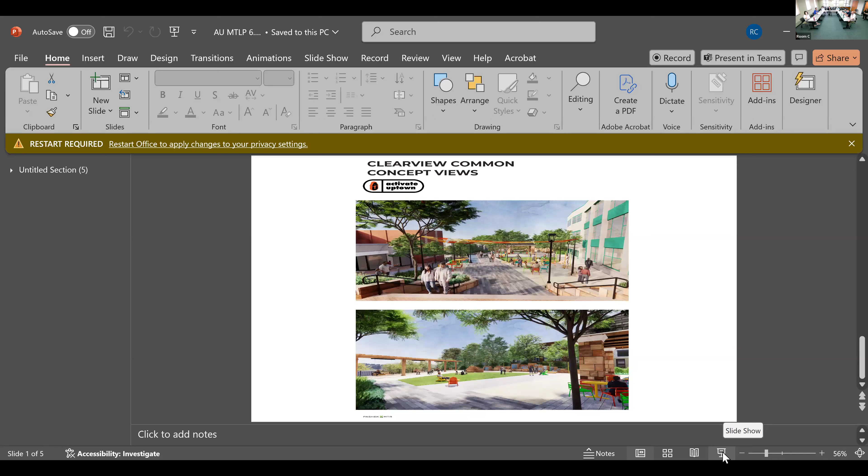Fantastic, well our techie is pulling it up. I'll start setting the table, and if you guys don't mind, I'm gonna stand up at the front just so I can point out some things, and I think it will be a better presentation for those in the room and anyone watching at home. You won't get to see all of my gesticulations, but we can describe them. That's right.

So again, this is the Activate Uptown presentation. This is a very high-level presentation, not the full report. So what I want to do tonight, my goal, my objective, is to give you a broad view of where we are with the Activate Uptown plan. The full report is under development right now by Pashek MTR, and we're getting opinions of cost by Gateway. My goal for the commission at this point is to present the report with opinions of cost in July, more than likely at the first meeting and maybe the second meeting, where I'll go through that, and I'll share the full report once it's complete. But tonight, I'm gonna walk you through an overview of the project area, and then get into some specifics and key nodes that we focused on. The Activate Uptown plan is a riff or a reverberation from the Vibrant Uptown project, which is complete.

This is more as a refresh, for those at home who might be watching at a future date. When we were planning that, we were looking at sidewalks, conduit lighting, really just the sidewalk, that public realm. But when we were doing that, it became very clear that we wanted to start putting attention into some key nodes that we can potentially activate and improve in the guise of placemaking.

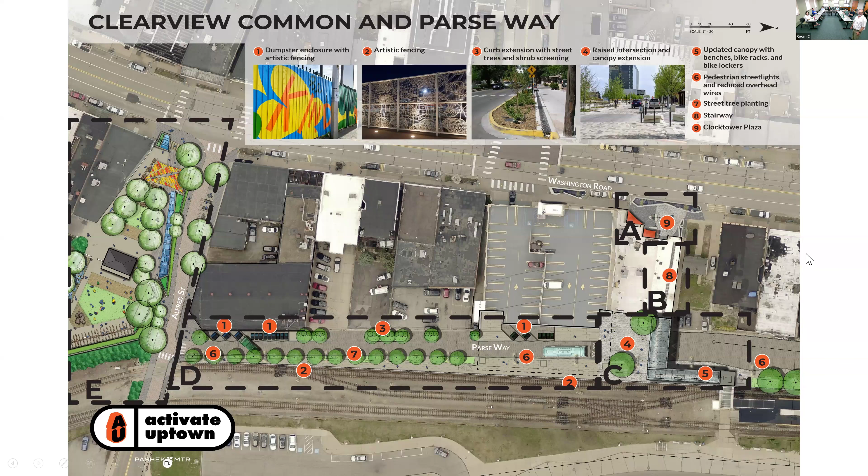Because this really, here we go, bam. So, Clock Tower Plaza. Some of the things I already mentioned, sun shading, and keep in mind this is high level conceptual. So when we go into actualizing this plan, we're going to be going back to the steering committee, of which Kirill sat on, and Grace from this body, as well as members of the partnership, Port Authority, various other folks. So when you see this stuff, we're not married to it. This is just giving you the concepts.

The mosaic public art that I mentioned was proposed for this very long bench seating that sits along the planter. An informational digital information booth, something we've talked about for years, and something that could roll out to other aspects of the district. But this seems like a good place to start. You could have the T schedule there, different events happening uptown, new businesses, things of that nature, to really kind of tie that in.

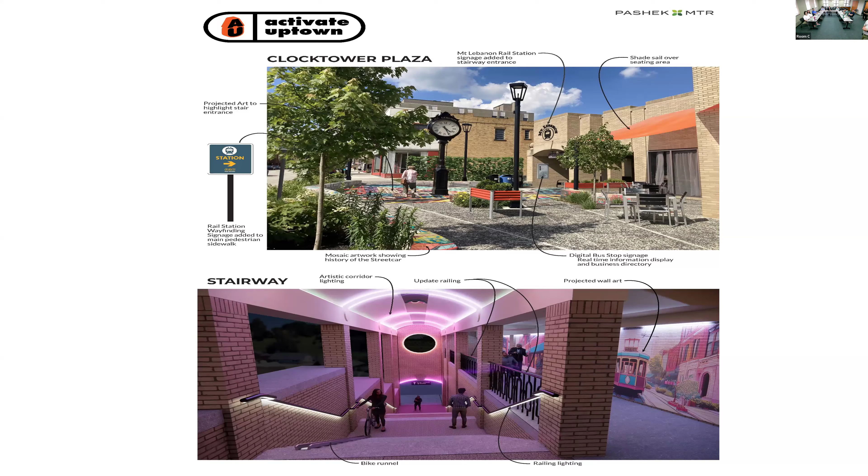All right, let's go to the next, please. This is where we're getting into what I keep calling the big idea, because it's going to be a big number, but it's also a big change.

So just to orient everybody, the current footprint of Clearview Common essentially ends here. Right behind is the pavilion. Right up around here is where the current fountain is. And then you have a series of terraces.

People don't use Clearview Common — they just don't. Now, we use it when we have events, but you rarely see people there. You occasionally see some teenagers or somebody sitting around the fountain, but it's not really fulfilling its mission. We want to change that, and hence what we're proposing here.

Before I get into the big idea, there are elements of this that, again, can be punched in. So there's short-term, mid-term, and long-term. When I do the full presentation to the commission, we'll really be teasing that out. But there are some very simple elements here that we can do now.

For example, the furniture that's there — that was bought at Target during COVID. I can't believe it's still there, but it is. We've had to do some repairs, so we're looking to invest in some better furniture, and that's something we can potentially do next year. You can imagine Adirondack-style chairs.

If you've traveled, or you've been in the Strip District, you don't have to go that far — what the Strip is doing is a lot of placemaking type stuff. So those are things we can do short-term. Sunshades, all that kind of stuff can be baked into the short-term planning.

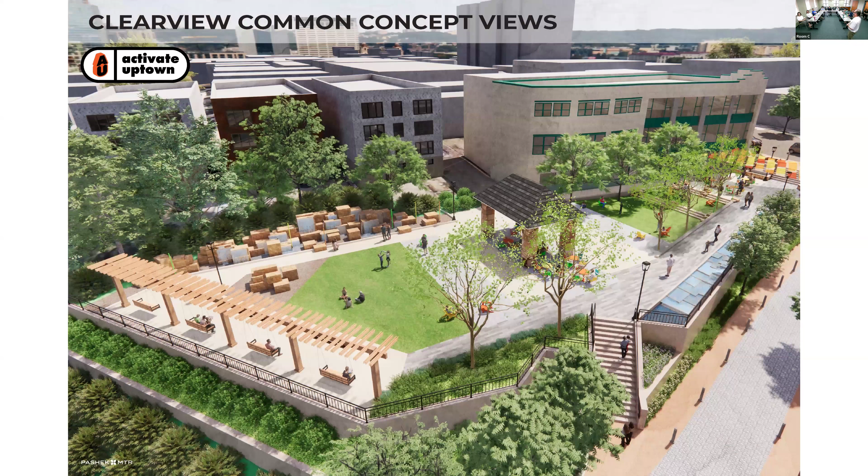So if we could just advance to the next slide. Now this is giving you a three-dimensional view of what we're talking about. Again, the swings at the back end, the rail line is here.

This is a rock runnel fountains circumstance, similar to what you see down around PNC Park, but not quite the same, that one you can kind of sit down in. This one you could maybe do that, but it's designed a little bit different.

There's the other water feature where we are proposing eliminating the current fountain because it has a series of problems and it's also just ugly. But we're looking to bring it yet another, imagine a cascade. We're trying to seize the topography, so water goes one way, down. We're trying to capture that and create the sense that you're in that sort of dynamic circumstance.

The pavilion is not moving, we're going to keep that as the fulcrum of the site. So when bands play, we may have to reorient how they set up, but that would stay as it is.

But you can see with the expansion of the Clearview Common area, this is someplace you actually would want to go, and someplace you not only want to go, but spend some time.

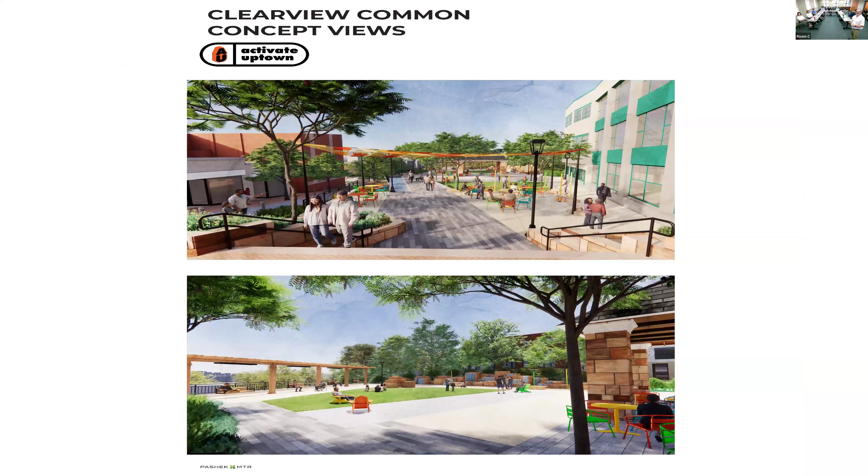All right, why don't we just go to the next one? So this provides some additional viewscapes of what it could look like, and you can sense that already just from these conceptuals. It's a radical redesign, hence the term I keep using, big idea, because there's a lot involved with this. There's a lot of engineering, there's a lot.

Grading is awesome. I mean, the fact that you're going to expand, I don't know if it's north or south or east or west, but... That's east. Okay, so expanding east feels really good.

Now, the corner where all the steps and the fountain are now, will that get... I know you said the fountain is potentially going away, but that, as your word is, janky, that's a little hard to navigate right now. It is, and again, it's Mount Lebanon, not flat Lebanon, so we have to deal with the topography that God gave us. But this gives you that view. So this is Washington Road up here, and you're looking down. So this over here would be that step fountain, over on this side. And the way that it opens up and leads you into the site, you can see all the way to the back.

So again, there's the pavilions, sun shading, new furniture, this type of thing. And you can start to see a little bit, a little flavor of what's happening to Alfred Street with zero curb, bollards, that type of thing. So you're not just transforming Clearview Common, you're transforming the entirety of the true center of Uptown. Clearview Common is the heartbeat from an urban planning perspective of the Uptown district. So you're embracing it, celebrating it, and making it something people want to interact with and not pass through, which is basically right now what it is.

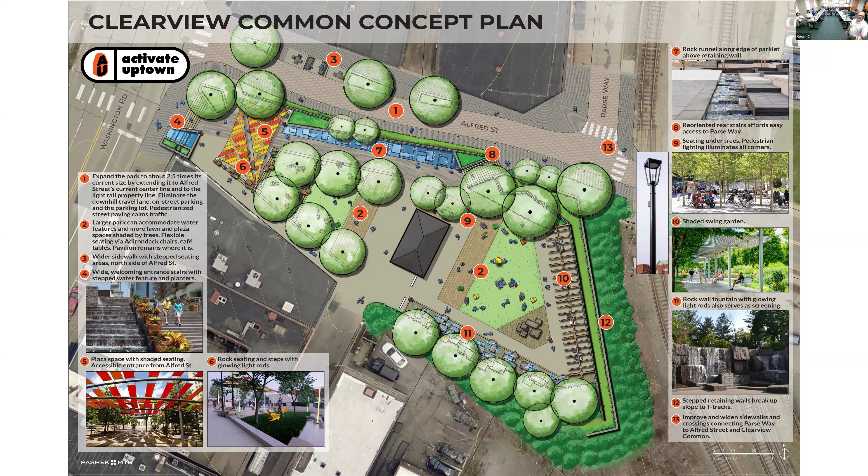Is that a driveway of sorts? Yeah, so this is an alley, and to this date, the current footprint ends right around here. There are two handicap parking spaces there, it's the only place we could legally put handicap parking, so a lot of people don't realize that. But you can park back here, there's ADA accessible parking, it would be here roughly. So this is an active alley, and cars currently do pull up here, and we have bands set up, things like that. So that would remain. There has been talk about potentially also improving the alley at some point, but that's not high on the list right now, though it's something that could be done.

But yes, the way that this is designed, there's another image I didn't put in the slide deck that shows vendors set up here. Because one of the challenges we have with the farmers market, people are like, why don't you just put it down at Clearview Common? Because nobody wants to be there, it's that simple. It's below grade, all these things, it's just not a pleasant place to be, and the vendors feel shoehorned. But yes, you could get some food carts in there, the farmer's market. Yeah, it'd be a nice place during lunch times, holiday weekends and things. Yeah, and we've tried that. When we did have a food cart at one time years ago, we had a hot dog truck. Didn't last long.

The thing I would think about is just a little more shade in there. The thing that keeps me out of Commons is the sun and the heat. It just feels kind of barren and open. More opportunity to bring your lunch from a place in Uptown, come walk, sit down, have a nice quiet place to have it outdoors.

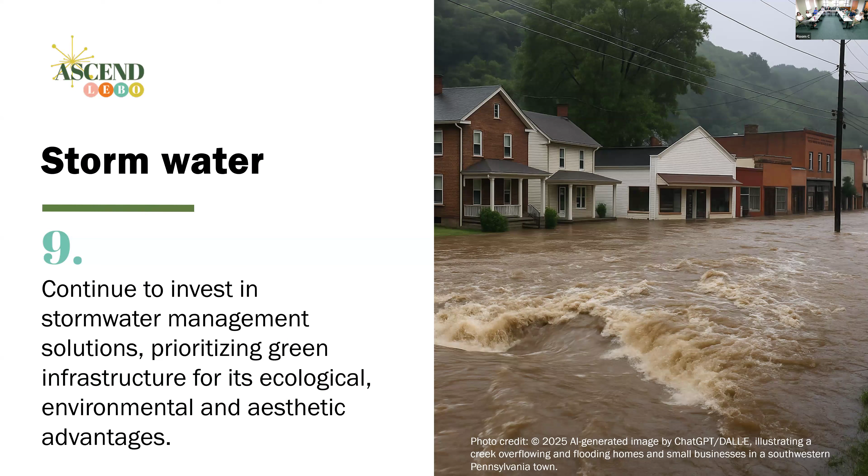So please, next slide. Since 2011, Mount Lebanon has assessed residences and businesses a fee because there are huge investments that have to be made. In fact, our township was one of the very first to move down that path, but now most, if not all, communities have some kind of fee. For a residential fee, and that's what I'm focusing on tonight, just residential.

Right now, it's a little over $10 a month. It will rise based on the board's actions. Ultimately, after 2028, it will just move with inflation because things keep going. So there is a real cost to residents, but it's a real cost to the township because we have to do this.

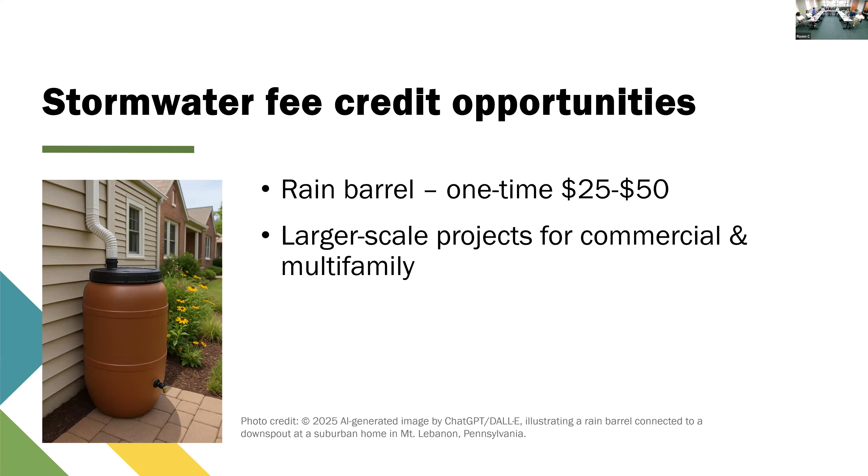Now, if you're a homeowner, resident here in Mount Lebanon, there are several ways that you can get credits against this fee. You can get a one-time credit between $25 and $50, calculated on the size of the barrel, and you can get that once. If you're larger scale, like projects for commercial or multifamily, you can do a large project, but it's the kind of project that requires a professional engineer to sign off on it. So this is not the kind of thing typically a homeowner would do, even if they qualify.

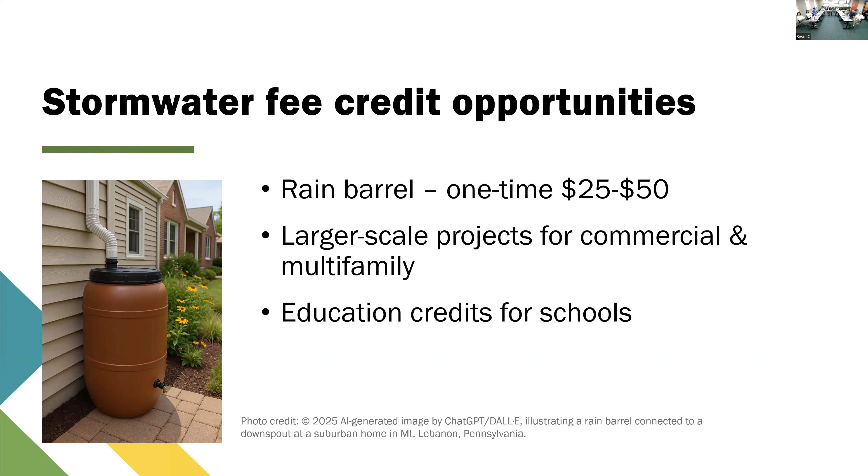And then the last thing is there's an education credit for schools. So these are all great, but I thought there might be an opportunity to do more. So I started to look at what else is happening. And in the city of Pittsburgh, they also have a fee, and they have this very complicated calculation.

It's called an ERU, Equivalent Residential Unit. They actually look at how much paving and roof, et cetera, you have. We don't get it that complicated. But anyway, they have credits also. They have a one-time $40 credit for rain barrels.

But what they do have that we don't have is that if you install something called a rain garden, and there's some other kinds of features that are similar in intent, you can reduce your fee up to 50% ongoing, not a one-time, but on a regular basis, if you can demonstrate that you've developed a facility that will capture 3/4 of an inch of rain runoff off of your impervious surface.

I have a friend who has gone through the process. It's a lot of paperwork for them. But basically, for a typical house, I asked our friends at ChatGPT if a typical house in the Pittsburgh area had a typical rain, what would it take?

You'd need about a 16 by 16 foot rain garden or some kind of similar feature. So it's not huge, it's not out of question. You don't have to dig up your entire yard, so it's feasible.

Dormont, our neighbors, they also offer the one-time credit, but they have a plan for rain gardens that you can get 25% off of your ongoing fee in perpetuity if you can demonstrate that you've retained 25% of the roof runoff for your property.

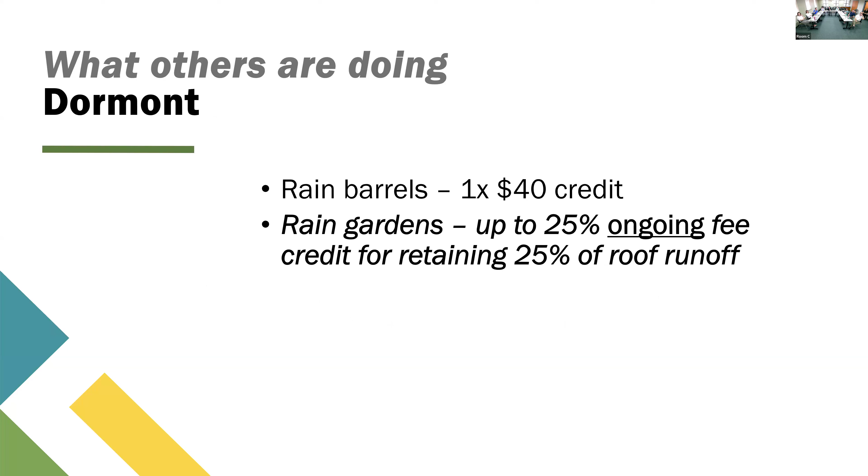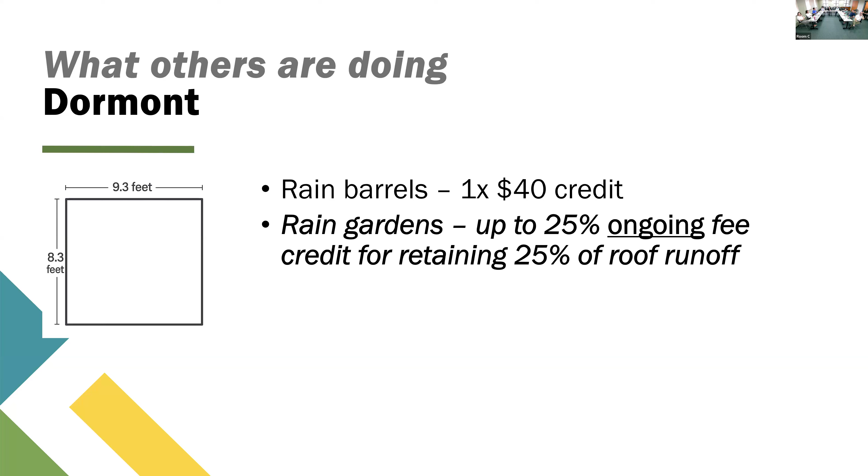And so, that's also not huge. You're talking about something about 9 by 8 for, again, a typical house. Now, that doesn't mean it's the same as the driveway or whatever, but this is just for a house roof. So it doesn't have to be huge if they are done well.

Rain gardens are not flower beds. They may have flowers in them, they may have good plantings, but they are engineered a little more than that because they are designed to retain temporarily at least a certain amount of water, typically 4 to 8 inches deep.

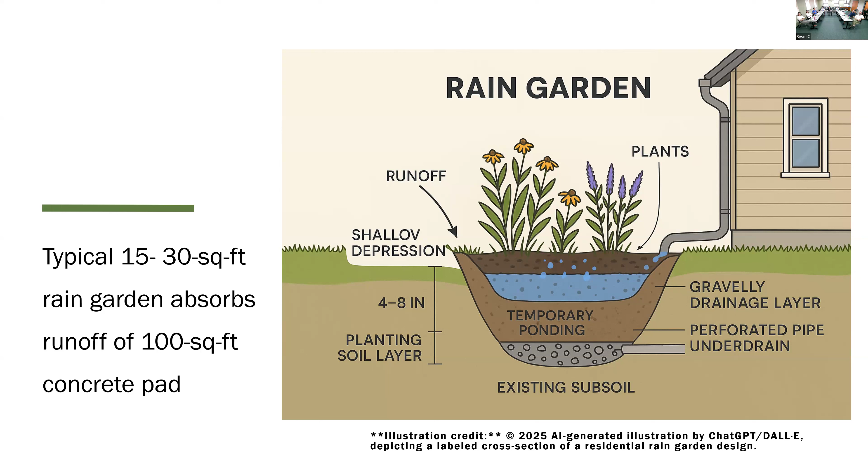They're prepared with certain types of soil and ponding material that will absorb the water. So there are criteria out there that you can develop that say this is what you should do. It's just not putting a flower bed in. Not that I'm anything against flower beds, I like them. But a typical 15 to 30 square foot rain garden can absorb as much water as you get off 100 square feet of concrete pad. So again, you're getting more than a one-to-one kind of benefit from this.

So what are the benefits if you try to promote rain gardens? Obviously, you reduce stormwater runoff. You improve water quality because you get this water filtering effect. It does help recharge the groundwater, and we've had issues with that. Beautification, biodiversity, obviously you're going to get more flowers, more biodiversity. It is a very cost-effective way to help reduce runoff. There's a lot of data out there. And finally, it fits into our goals of climate resilience. Breaking up concrete or other kinds of areas that absorb heat, all the better.

One last place, this is in Washington, not as local. They have a very aggressive program called RiverSmart. If a resident gives them $100, they will match it if you purchase and plant trees on residential and commercial property. They will give you up to $1,000 for rain barrels at $2 per gallon, $3,000 for rain gardens, and up to $6,000 if you replace impermeable surfaces with either vegetation or permeable pavers.

And as much as I love sidewalks and paving and stuff, Mount Lebanon has a lot of paving. And there are places where maybe we don't need as much. So I have this set for questions.

I have one more slide where I'll go to what I would recommend at our next meeting. I'll give you time to think about it and get the rest of the board to look at. I just want to give you time for questions since I ripped through it pretty quickly trying to stay on time. So that's my proposal: we need to do more as a community to incentivize residents to take action on their own properties before the water gets into the storm system, because once it's there, it becomes very expensive to deal with. We've had to invest a lot in it. So any questions about what I ran through?